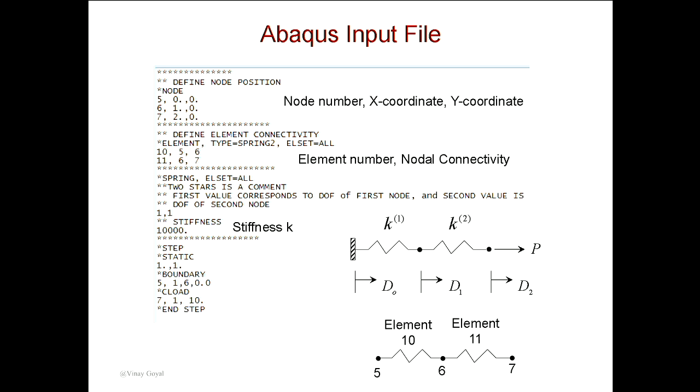Star C load is a concentrated load. You can apply a concentrated load, applied to node number 7, degree of freedom number 1, with an amount of 10. If you look, we get the solution here. If you do a hand calculation to get the deflections measured here and here, the values provided will match your hand calculation.

Does that make sense, everybody? Just a really quick synopsis. If you have additional questions, Leonardo will go deeper into it, both the GUI and by hand. In your homework, you also have to do it by hand. I want you to create that input file by hand. That's the goal.

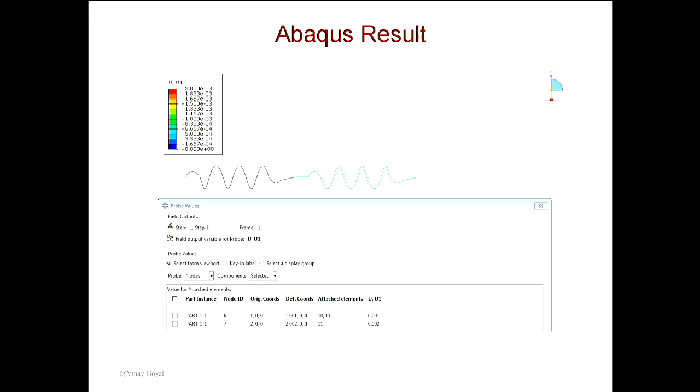Let's tackle a case I did not cover. I think I need to cover it a bit again so it's clearer, because problem 2 of the first homework deals with this, and I want to make sure it's very clear how we handle this particular problem. Let's look at a special case where you apply constraints that are non-zero. I covered that a bit last Tuesday, but today I'll go a little deeper.

The original example I gave was a 3-spring system fixed on the left, so G equals 0, meaning the amount of deflection applied is G equals 0. On the right-hand side is a load applied, P. We talked about that when there's a 0 constraint, you just make the code number 0 and 0. These are the degrees of freedom that are left, 1 and 2. That was the original example, and we solved that.

And we manufactured the code number matrix. Element 1 is 0 and 2. Element 2 is 0 and 1. And element 3 is 1 and 2.

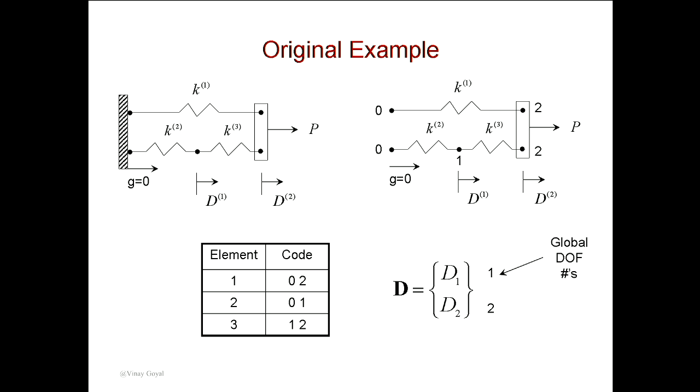So we devise that. For the original example, we finish it up, we did all the work for the assembly. But for the modified example, the one I want to give today so you're able to do homework problem number 2 more intelligently, let's say this is a non-zero applied deflection.

So apply 1 inch or half an inch. In that scenario, what I recommend is don't make it 0, make it 1. Don't put 0 for the constraint, just put 1 there for that particular degree of freedom, and then number the rest of it 2 and 3. So my code number for element 1 is 1 and 3.

For element 2 it's 1 and 2. Is that correct? Is everybody tracking? Yeah? For element 3, then I have 2 and 3. That's the code number. And so now the deflection or displacement vector is basically G, which is known.

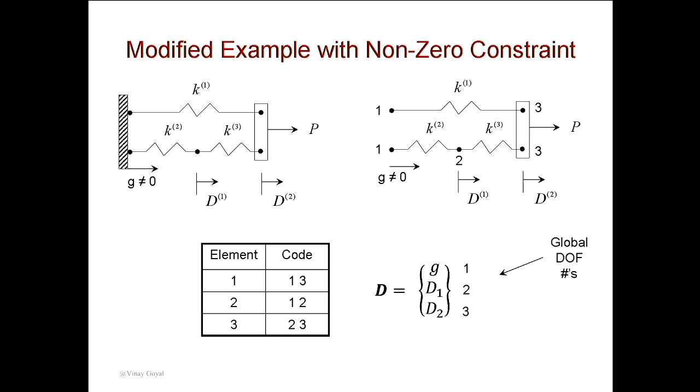This is like 1 inch, half an inch, okay? D1 and D2. So what you do now is assemble it this way, using this procedure. So you go and assemble it, and you can see now I got a 3 by 3 matrix. Before, in the original example, I had a 2 by 2. But in this example, I have a 3 by 3 because now I'm including the non-zero constraint in here.

That becomes important because what I want you to do is be able to go back to the matrix here. The whole K is known. That's all known. What is the only unknowns here? Somebody? D1 and D2, those are the unknowns.

But G is known. And since G is known, there must be a reaction force. There's no load applied on degree of freedom 2... and on degree of freedom 3 there's a load applied P. So all you have to do now is use the procedure I discussed in the previous lecture to solve for D1 and D2.

You can do it by hand, so you can actually solve the last 2 equations for D1 and D2, and then basically solve for the reaction force. But this is the automated process to do that if you wanted to do it with matrix notation. Any questions there? I already covered this before, but I'm covering it a little bit deeper because I think you're going to need that for problem number 2.

Is the non-zero constraint just for practicality, or is that just to learn? No, you can have situations like that. So say you have a heat transfer problem. In a heat transfer problem, I could apply a temperature. Well, that temperature is a non-zero value, right?

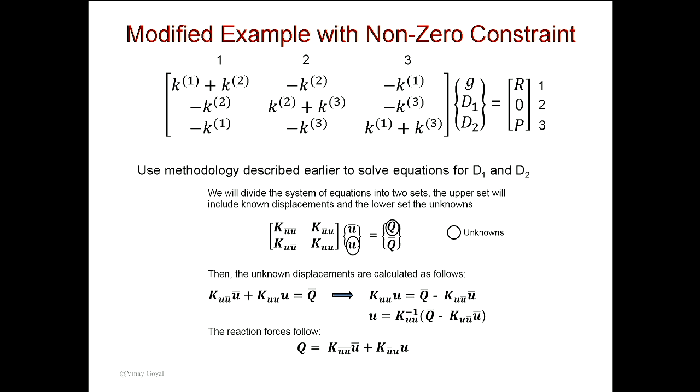I'm going to try to make the class practical. The homework, in some sense, is also practical because you'll try to discretize the domain for several different problems. But I'm not going to give you a rocket or an aircraft to solve because it will take a long period of time. I hope that at some point we can get a CAD model of a part, and then we can mesh it and do that kind of thing. I think that will happen down the road, hopefully.

All right, so that's it for springs. Today I'm going to transition to trusses, and then next week I'm going to transition, hopefully, to strong form Galerkin. That's the next topic coming up.

So let's tackle trusses today.

Any questions? Any thoughts? Anybody wants to contribute? I also welcome people that want to contribute from industry. If you're from industry and you want to give a lesson learned about something you did wrong in finite elements, let's share that so everybody else can learn that experience. That could be a good thing.

Today I found an error in a model where the coefficient of thermal expansion was per degree Celsius, but then the temperatures being used were in a different scale, like Kelvin or Fahrenheit.

So we need to pay attention to that. Some people don't pay attention to that, okay?

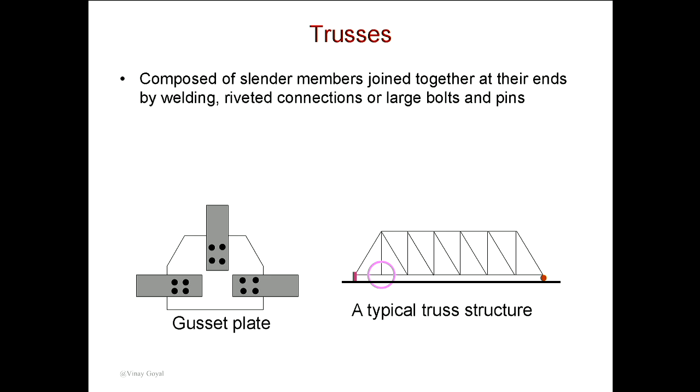Let's look at a truss analysis example. So for finite elements, a truss, in general, you've seen trusses, and this is not just strictly for civil engineering. Trusses also show up in a lot of applications with launch vehicles, spacecraft, and other things. I show a civil engineering structure because it's typical and easy to show. But if I look at a connection in a truss system, typically you'll have a gusset plate, and you have members connected like that.

In general, these connections use large bolts or large pins, but we're going to idealize that. You may have learned this in mechanics of materials, so this may be a repetition, but we'll idealize that connection as a frictionless pin. That way, the system now behaves like a two-force member. It does not take any bending, and no moments will be transmitted through a pin. Later on, we may be able to cover frames, which will be able to carry bending through the connections. The weights of the members are typically neglected, and trusses now become two-force members, meaning that the forces carried by each truss are only along the axis of the length of the truss. It can only take load along the length of that truss.

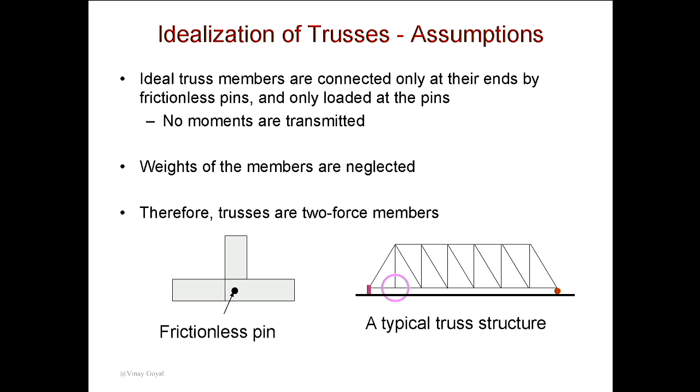From that perspective, if I look at the assumptions, basically you have a two-force member. Each truss can either take tension or compression, as you see there, but it will only be along the length of the truss. Does that make sense, everybody?

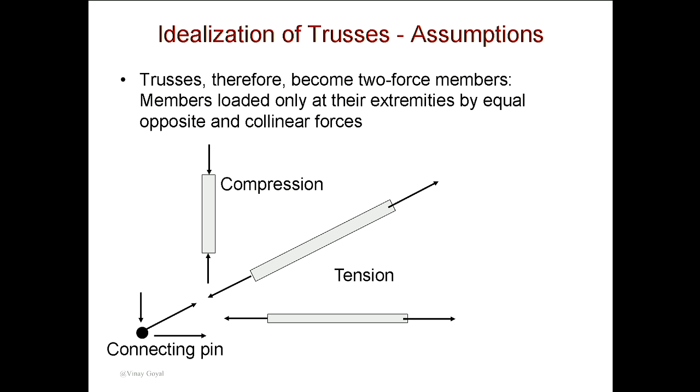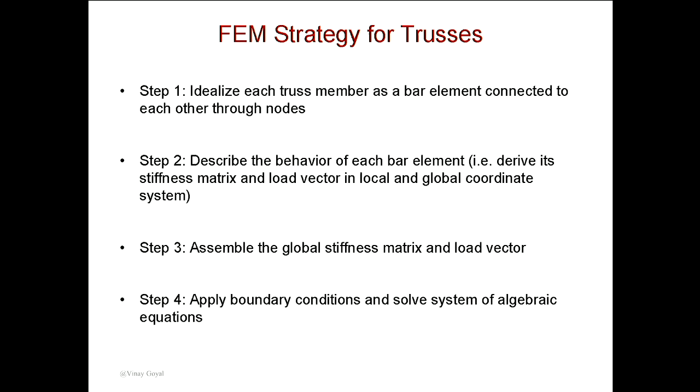Okay, so with that in mind, the strategy we're going to use with trusses is the following. Step one is to idealize a truss structure to be discretized into elements. The second step is to describe the behavior of a local element - we talked about the first step being discretizing the domain, and the second step is to approximate the behavior over a general element. The third is to assemble the system together, and you've already learned a little bit how to assemble things, and today we'll talk about that as well. Number four, we'll apply the boundary conditions, apply the loads, and then solve a system of algebraic equations.

So let's look at this example. This example is a truss system, and it's fixed here at the bottom. What you have here is element numbers being shown: 1, 2, 3, 4, 5, 6, 7. In general, this is a truss system I'm giving you, and we're going to discretize it by calling out the element numbers - that's 1, that's 2, that's 3, and so forth.

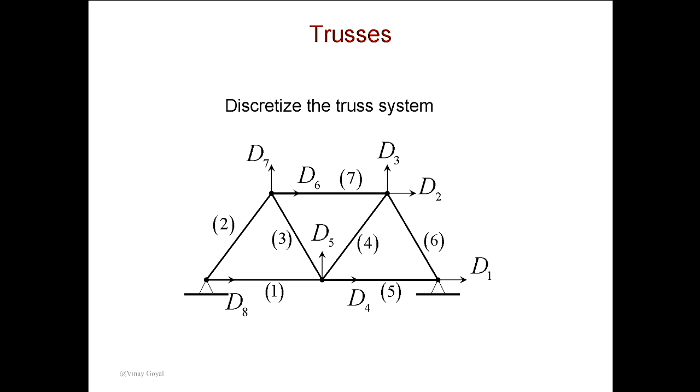Let's see, so in the next slide, I think there's - yeah, so let's continue here.

So if I take one truss member and try to understand its element behavior, I already know that a truss can only take loads along the length of the truss. For that reason, I'll look at it, and that's how this element behavior, at least the diagram for this element, will look like. This node could move an amount di, this node could move to the right an amount dj, and correspondingly there will be an internal load acting on this part, balancing the external forces being applied. So at the local element, you're trying to develop the element - we call it the element formulation. Anytime I talk about developing the behavior of a local element, this is called an element formulation - formulating how a general element behaves. Because the idea in finite elements is if I can generalize the behavior of an element, I basically know the general behavior of any other element that has the same shape. That's the whole point of finite elements - it simplifies life, it simplifies the process.

So if I look at the stress acting on this bar, that's P over A. If I look at the strain, it's basically the relative deflection, dj minus di, divided by the original length - everybody knows this formula, change in length divided by L, basically. And so you know that stress is related to strain through what? Hooke's law - stress equals E times epsilon. How do I know this relationship? Stress related to strain - how do I find this relationship?

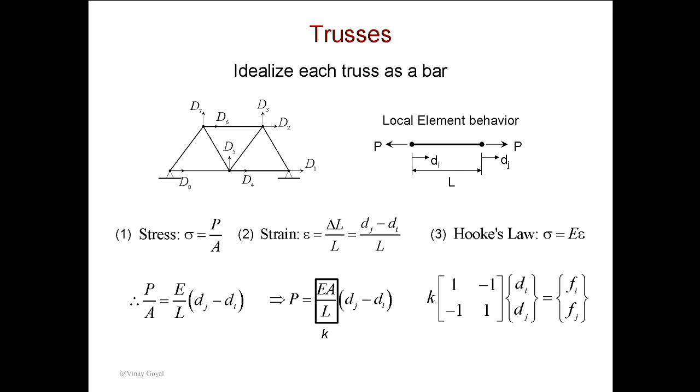But this is the problem. The problem with this is that I have bars oriented in different directions. That's the problem. So maybe that formula works very well for the bar that's horizontal, but if I have bars oriented in other directions, how do I deal with that?

Because the idea in finite elements is to be able to have a systematic approach. And so I want to have global deflections that are referenced to a coordinate system - this is my X coordinate system, this is a Y coordinate system. I don't want to have a bunch of local coordinate systems. I want to be able to relate that local coordinate system to the global coordinate system and still be able to solve the problem efficiently. Does that make sense?

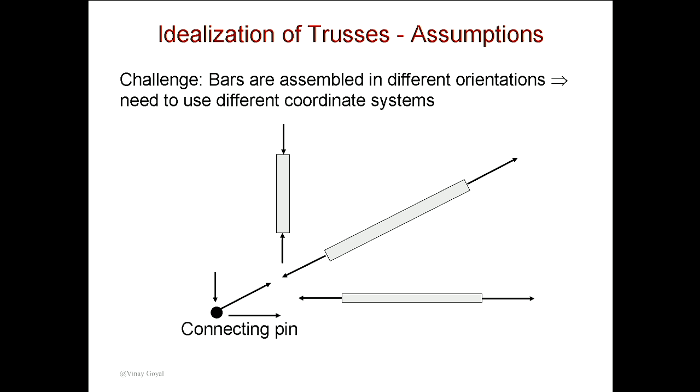Okay, great. So what I'm going to do - don't get freaked out with the math, but if you take your time to be patient, you'll follow it. That's really the goal here.

So I'm going to attempt to use this for the first time. We'll see how this goes. Pen on. Good. All right, you're not going to see my face for a little while. I don't think this is good, whatever happened. Okay. All right, so if I look at a regular element, which is this one here, let's see if this writes. I don't know what that's coming up. Okay, this methodology is not working for me right now. So that's okay, we'll continue. Old school, old school, all right.

So if I look at the local element behavior, that's a local system. If I look at how much the deflection will be for this node, it's going to move some amount to the right - okay, let's call that del jx. What I really wanted to do is represent that in the global coordinate system. How do I do that?

Well, that can be represented, if I know the angle beta, I can then break this up into two vectors, this one and this one. So I can project this del jx into x and into y by using the cosine of beta. Does that make sense?

Okay, and then now I look at this contribution here, this del jy. And again, I can do the same thing. That del jy is this one here. I can now project that into the x-axis and y-axis, right?

And so if I can do that, now what I need to do is relate this - so that's a contribution of del Jx and del Jy. I have to relate this now to the global system. Let's say the global system, the deflection is dJx and dJy. Okay, so tell me how I calculate dJx then.

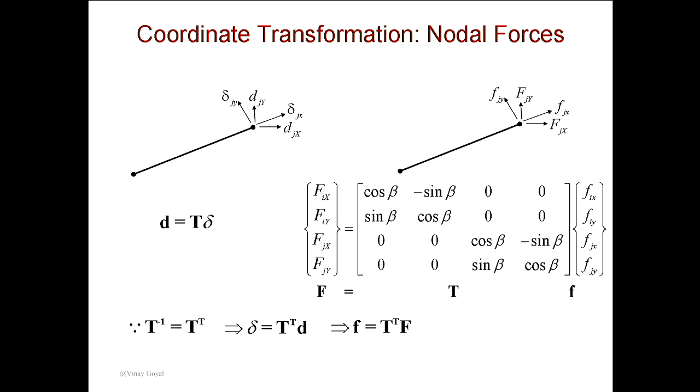Because this class, that's what computers are for. They're there to track all these matrices. And that's what finite elements is about, coming up with an approach so the computer can take care of it. So don't feel like you have to know the steps on how we derived it, because that's what this class is about. But what I want to make sure is that you are not stressing yourself out, okay? Because if you stress yourself out, you will not learn, okay? So that's what's important right here for you to understand.

That we come up with the element formulation that works by referring the quantities to a global coordinate system, because that's what trusses have, orientations that are not straight. They're different orientations. So let's move on here and look at what that calculation looks like.

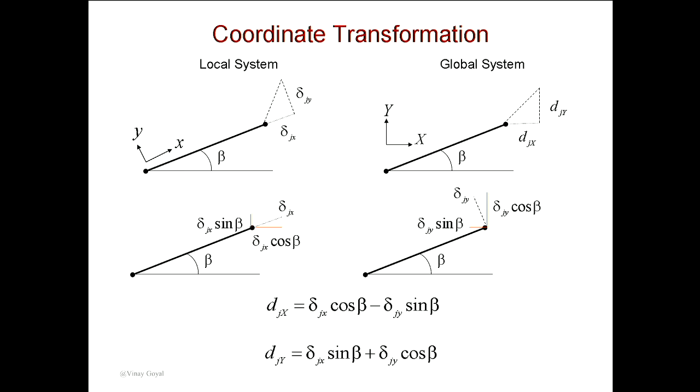Okay, what's important for you to also remember is how that beta is measured. Beta, in the way we've defined it, starts from the x-axis, measured from here, this x-axis, moving counterclockwise. Okay, so that's what's important for you to kind of keep in mind.

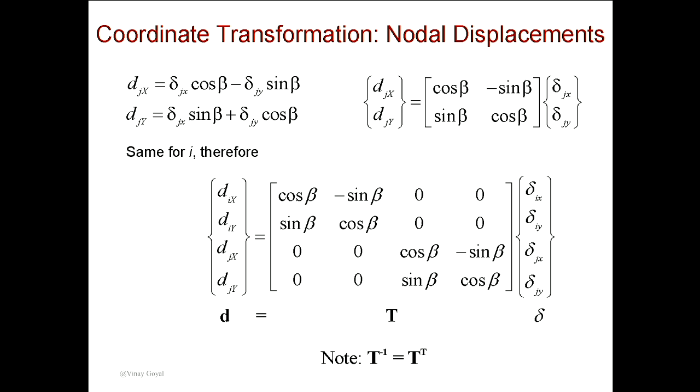That's important because when you develop an element formulation, you have to keep track of how you develop the element. You cannot arbitrarily make up a convention and then switch it later. You have to keep track of that.

So now I know how to calculate a stiffness matrix. And the question is, how do I apply this? Well, that's what we have examples for, to go through that process.

The same process for assembly, we already have the element formulation here. Everything is in global coordinate system, isn't that nice? And I have the local element formulation, I have the stiffness matrix, and now for every element I will have 4 code numbers now that I have to track, not 2 like before. So you have to keep track of that.

In this example, the summary is basically we discretize the body, we develop the local element behavior, and then we'll use code numbers to assemble things together. And I'll give you an example, hopefully it'll be of help. So example number 1 has a truss system as described on the left-hand side.

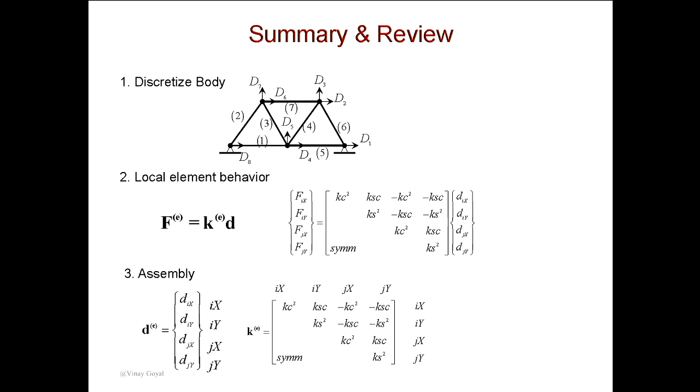Any questions? Any questions?

So as an example for element 2, all I have to do is plug it into my formula for K. That's all I have to do. Let's look at the code numbers.

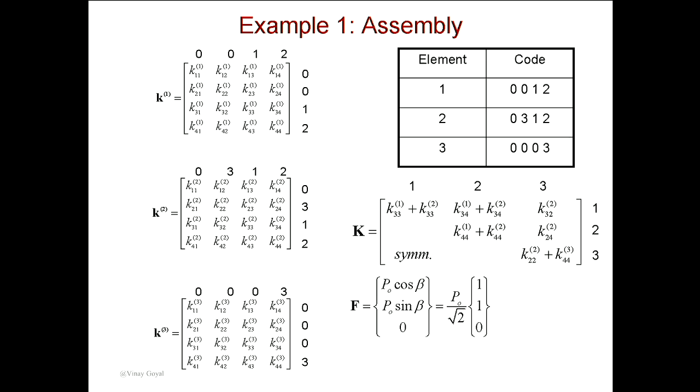So when do you assemble the force vector again? Here, there's no reason to assemble the force, because remember, we talked about applying concentrated forces. We're applying concentrated forces at this level, in the global system. The forces are not applied at the local element level.

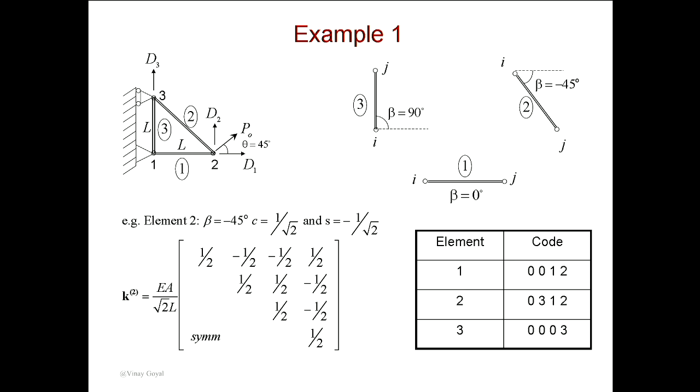Now remember, there's a difference here. In homework problem number 1, there's a distributed force. I want you to go back to lecture 1, where I show you how to deal with distributed forces. Those need to be tracked at the element level, and those need to be assembled. Let's look at that again if possible — you're going to need it for problem number 1.

So in this problem, what I'm looking for is deflections. But in real life, am I just looking for deflections? I want to know when the structure fails, whether it's safe or not. Deflection can be an important consideration, but you also need to look at whether the structure fails by force. That's the angle — in both problems I gave you, I'm asking you to calculate the stresses as well and compare them to the allowable of the material.

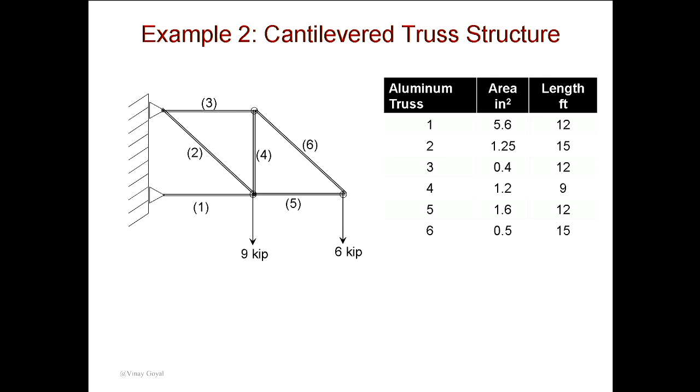So moving on here — where do I have it fixed? Here and here. So what code numbers will I assign here? 0 this way, 0 that way, 0 this way, 0 that way. In the next line, what I show you is the element number, the way I've described it: 1, 2, 3, 4, 5, and 6. And then the other thing I've done is put the code numbers here: 0, 0, 0, 0.

For this node, I'm making it 1 and 2. But I could have made this one 1 and 2 instead — I just chose this way, to answer your question. This makes it really hard for us since we don't have a grader yet, I hope we get one, but it makes it hard to grade. There's a reason why I'm asking you to compare to Abaqus — it better be right, it needs to compare well to Abaqus. So 3 and 4, and then we'll make this 5 and 6.

So how many degrees of freedom do you see here? Six degrees of freedom. It's kind of painful, right? Because you have to invert that, and I don't want anybody here to invert it by hand. You want to use MATLAB in that situation — or Excel actually can invert things too. Surprisingly, I didn't know it could do it.

So for member one, what is the code number? Don't look at the solution, focus here. What is the code number? I start with node I, and that's node J. So the code number is 0012, and that's what you see there. I chose this direction — you see these arrows? That's how I chose to start the element, from I to J, for every element. You can choose any direction you want, but then when you calculate beta, you have to be consistent. Beta is measured from I to J, the line that joins I to J, to the x-axis. That's how you measure beta.

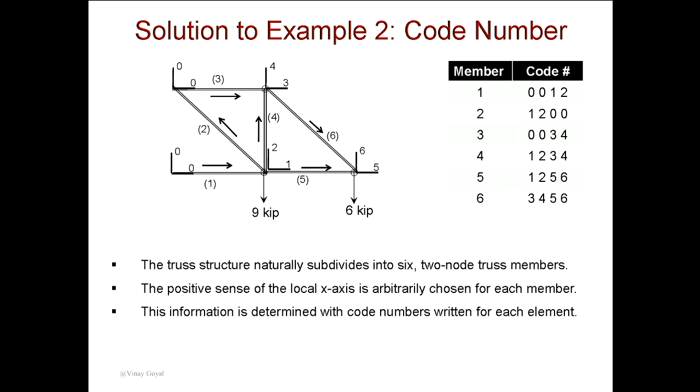So let's do another one. Element 6 goes from I to J here, so that's 3, 4, 5, 6 — for element 6. Anybody want me to do another example? Well, you follow it. We're good? I like when you guys do this — it means I can go on. That's great. So now I have a load applied here, a load applied there, great.

All right, let's just keep moving on here. It's going to get boring from now on because it's really easy. Member one — if I is here and J is here, how much is beta?

So beta is 0. EA over L is easy. The modulus of aluminum is 10 times 10 to the E6, but you see 10 to the E3 because we're doing everything in kips.

Area is given for each truss member, so you have that information. The length is given. Now it's a trick problem because the length is given in feet, 12 feet, so I have to convert that into inches. I see a lot of errors being made in industry, so you will see discrepancies. You have to convert everything to be in the same unit, okay?

And I'll trick you in a homework and midterm exam because I want you to learn it. I want to make sure that you are aware. You're not just trying to mechanically solve something. You need to use your head and try to understand what you're doing, okay?

And so from that perspective, we get K. And if I substitute in my formula, in the formula that I had there earlier - this formula here, cosine of beta, sine beta - you put all this in, you will get for beta equals 0, that to be the stiffness matrix for that element, just for that element.

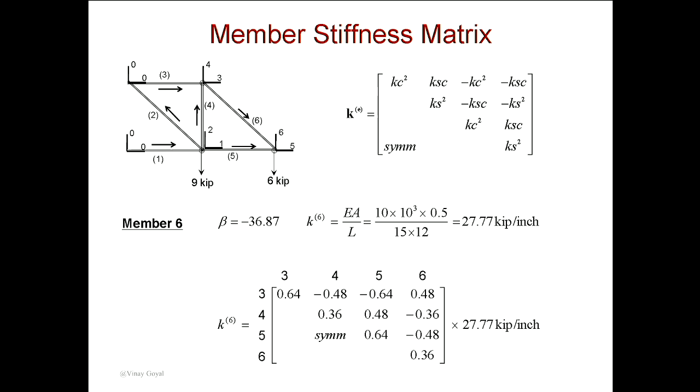I'm only applying a load here, with code numbers 6 and 2, locations 2 and 6, and they're actually acting opposite, in a negative direction. So if I go here, that's what I did: in position 2, I put -9, and in position 6, I put -6.

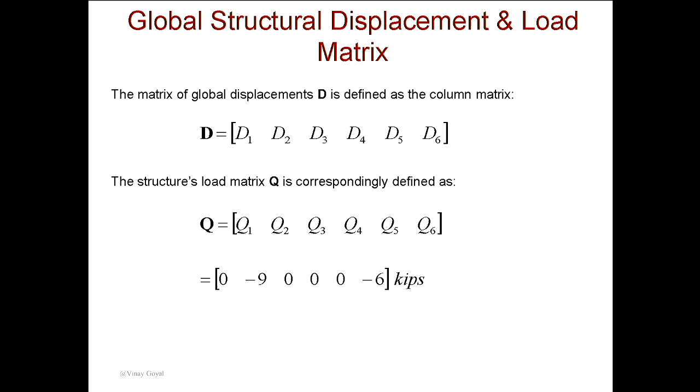Now I have my stiffness matrix, I have the deflection matrix - sorry, stiffness matrix, load vector. What do I need to do now? Invert K and solve for the deflections.

Moving on here, let's say - so now, are you done by just getting deflections? Are you done? I mean, we can go home because we calculated deflections. What else do I need to do?

I want to know, in addition to knowing deflections, which is great to know, I want to know when the structure fails. So then I need to calculate the forces in each member. To do that, I know the deflections, so what I'll do is go to the local elements and calculate that information.

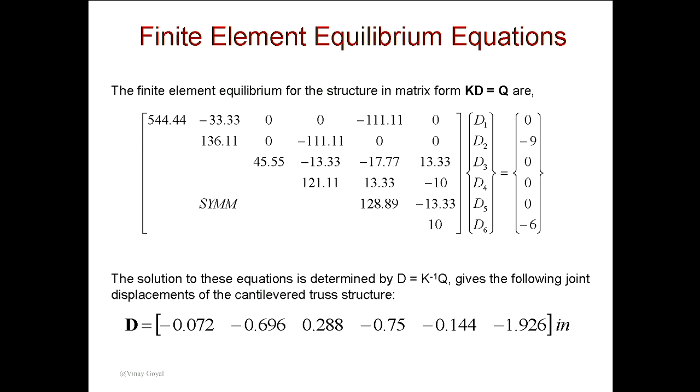So if I look here, remember guys that the local force was described as small f. Remember that? The local force, right? So let me go back and remind you that a little bit.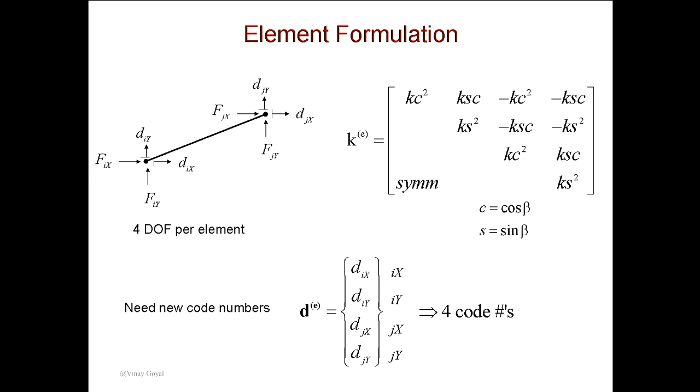So if I go to the diagram here, the big F was the global direction, the force in the global direction. I'm going to look at small f, which corresponds to the local direction. That's the one I'm interested in, because I'm interested in the force along the truss.

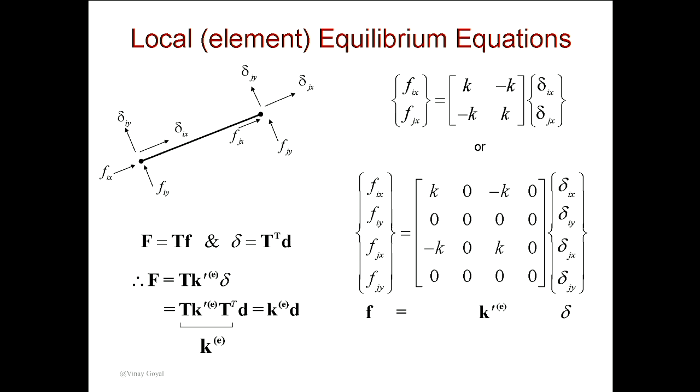And so we came up with the equation - I don't know if you recall - the relationship of forces in a local element in the global coordinate system, and then forces in the local element in the local coordinate system. We have a relationship there. So let's use that relationship to try to calculate the local forces in the system that I care about.

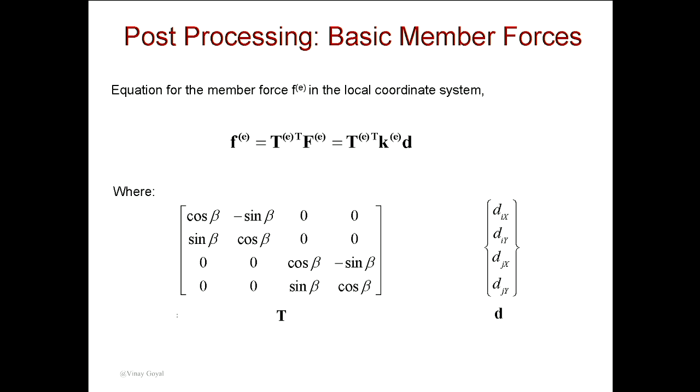Oh, here it is. So small f equals the transpose of the transformation matrix times big F, and big F is K times D. I know this, right? And so T, the transformation matrix, is known, and all I have to do now is calculate that for every single element.

So let's look at how I did that there. I know the transformation matrix for element number 1. I know K, I know the deflections - I calculated these numbers already, I got this earlier. So this was 0, 0, and then code numbers 1 and 2, D1, D2. This was the value for D1, that was the value for D2.

So if I multiply all these things together, guess what I got? Look at the numbers I got: the force is 28 along here, and then 0 transverse. That makes sense - that's what I told you we should be able to get before, because that's the assumption in this theory. So that's a great check, actually. If you don't get zeros, then you have a problem.

The question is, is the member in tension or compression? So you can draw it, because we say FIX is 28, so that stays the same direction. FJX is minus 28, so we need to reverse that. So how is it acting? In compression. So that's how you know it's in compression or tension.

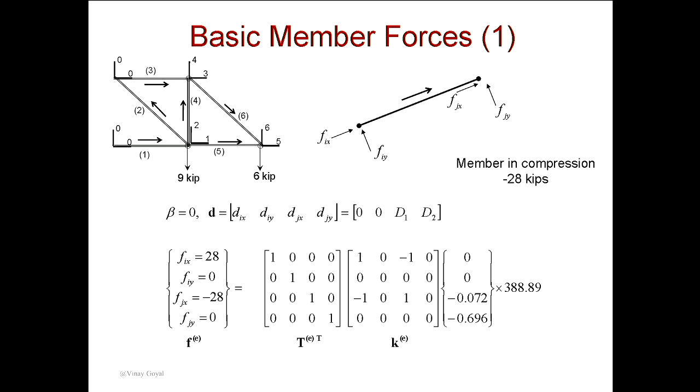Let's do one more example, because I don't want to bore you to death. It's the same formula over and over for every single member. For another member, we calculate the transformation matrix, multiply by the stiffness matrix for that element in the global coordinate system, times the deflections. And in this case, what do I have for element 2?

For element 2, I'm here, and that's 1 and 2, 0 and 0. So I have the deflection D1, the deflection D2, and 0, and 0. And if I multiply all this together, guess what I get? I get 0 transverse to the truss. That's right, it should be 0. That's what we talked about, because these members only carry load along the truss.

And finally, I have minus 25 and 25. If I plot that here, minus 25 means I have to reverse the sign, or the orientation of that vector. And then 25 is acting that way, so that means tension. And then I can repeat this process for every single member, and we've done that here for every single member.

Now, to get the reaction forces here and here, the approach is that you're going to take, remember I put here 0 and 0, 0 and 0? So let's just number those out, 7 and 8, 9 and 10. Let's finish it up, and then you'll assemble the full stiffness matrix with 7, 8, 9, 10 included. Then when you multiply that by the deflection vector, okay, because these are all zeros.

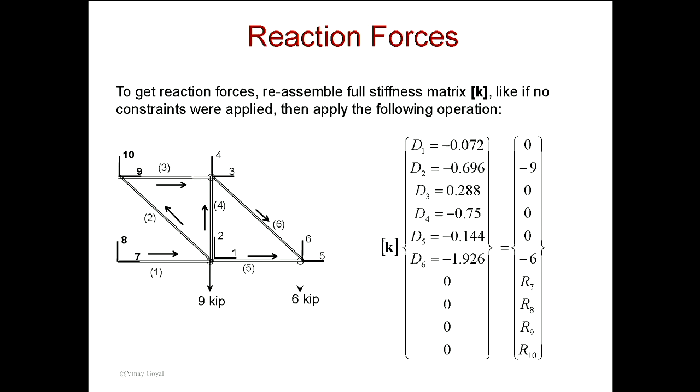Does that make sense? Now I apply the external loads—C load, concentrated load. Where's the concentrated load applied? We talked about applying it here and then here. In the original example problem, if you go back, you can see it was 9 kips downwards, 6 kips downwards in these two nodes.

So let's go back to the problem, and I applied it in node 2, right? Does that go in node 2? So node 2, degree of freedom 2—the force is acting in the vertical direction, and that's degree of freedom 2 for that node. That's minus 9,000 pounds. And then for node 3, I have 6,000 pounds downwards, so node 3, comma 2, because degree of freedom 2, minus 6,000 pounds. Submit it into Abaqus.

Abaqus solves it within like 0.01 seconds—I'm not kidding. All that effort I put in, all these charts I was showing you, and then Abaqus just, bam, does it. Well, then what is the next step, guys? What if this thing was deforming upwards, the whole thing was going up?

What would you say? There was an error. There's a problem. Because I apply the load going downwards, I expect the whole thing to move downwards, right? So it's very important for you to check that things make sense. And also you can check other things, like the deflection should be the highest here, that makes sense.

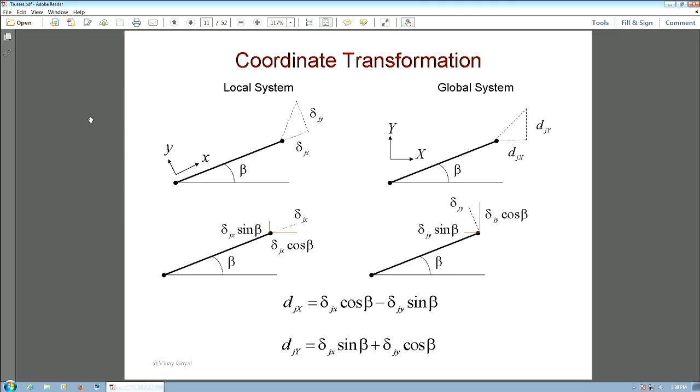Okay, now that you're back, I'm going to offer you an opportunity to make extra points as well. One opportunity that you have in this class is that you'll have the chance to program, and you'll get points for submitting a program that actually does what Abaqus just did. So if you develop an input file just like this one,

and you write a program that takes this information and gets all the deflections, gets all the forces automatically, then you'll get extra points if you submit that. It needs to be well explained, the code needs to be well explained. You should have a cover page for the report with explanations of how you went about it.

Throughout the course, I'm going to offer these opportunities for various problems. For the truss system, I'm offering this opportunity because it's a great way to start learning how to code stuff up. I give you some resources in my book on how to code these things with pseudo algorithms, and in the appendix I have MATLAB examples on things like that. I won't have time to teach what's in the appendix, but

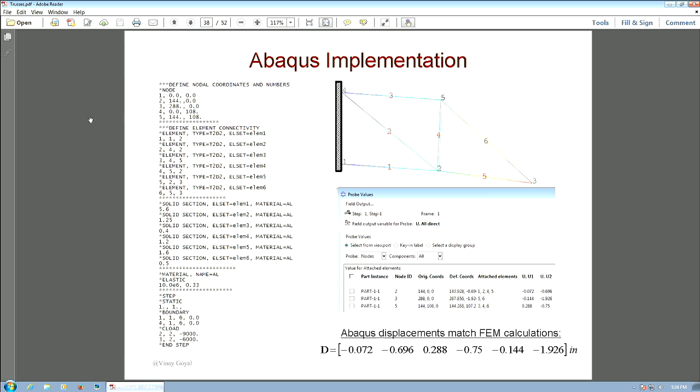Yes? So the code should be specific to a problem or can it work for any number of elements? No, the code has to work for any problem. Well, I'm not going to make your code work for 10 million degrees of freedom. It should at least work for 100, right? It should work for a large number of elements and nodes. I want to make sure it works, right?

And not only that, you have to show that it works. So you have to run some examples with your code, and then compare it with what you get with Abaqus. You can prepare tables comparing Abaqus to whatever you think is necessary to validate your code, deflections, forces, yeah. But I do want to warn you, I don't want you to put this as the highest priority.

The highest priority is to finish the homework first, do the CAE part of it, and then if you have extra time, because you have so much free time, code it up. And I recommend it. When I took the course, I did it, and for me it was not extra credit, it was required. And I learned a lot by doing it, okay? So I do recommend it.

But I also know in a quarter system it's pretty tight. When I did it, it was a semester system, so I had more time. So for that reason, I'm making it optional, but strongly recommended. If you're going to pursue finite elements as an area of expertise, strongly recommended. Okay, but with great reward, you get points, extra points. Okay, great. With that said, I'm going to move on.

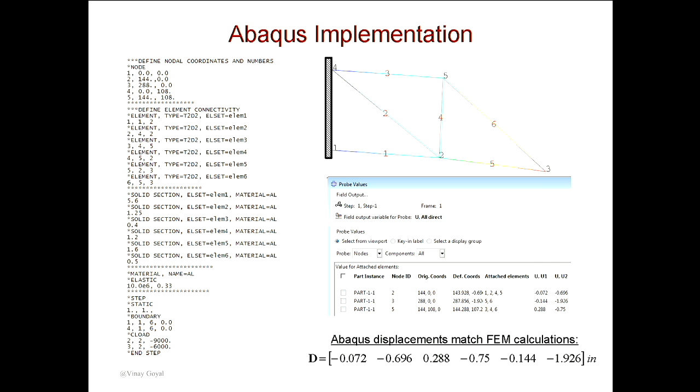All right, so moving on here, I want to give an example of a situation that you could encounter in real life. A situation where this node, for example, can only slide on a slanted surface, okay? With a slanted surface measured at an angle alpha along the x-axis. So this is a roller, and now I'm going to ask you a trick question.

This is a trick question, a good exam question too. If I have made it fixed, do I need to worry about what I'm going to explain next? If I draw the triangle, rotate it like that, and make it totally fixed, do I care about what I'm going to say next? No, because it's fixed. So the deflection this way is 0, the deflection that way is 0. Okay? What makes this problem a little bit challenging is that all my loadings and boundary conditions and deflections were converted into a global coordinate system.

However, this roller makes it difficult because it is an inclined surface, and now I have to somehow approach it, right? Because everything is in a global coordinate system. The deflections are, the forces are, but yet the constraints I want to impose are easily imposed in a local coordinate system. So here you can see that. It would be easier if the coordinate system was this way, perpendicular to this surface and along it, because that way I can say, okay, perpendicular is 0 and along is free to go, right? I can't do that right now easily in a global coordinate system.

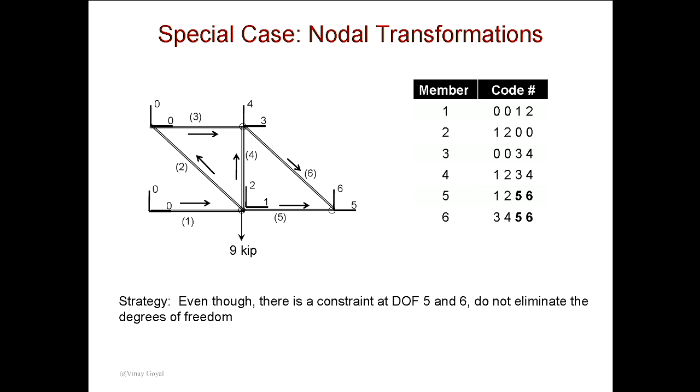And so I'm going to proceed the same way as I did before, assemble the whole thing with code numbers. I'm not going to repeat this because it's the same approach. But what I'll do, and this is where the tricks come in, and I hope you can follow me. And if you don't, please ask me questions now.

What I'll do, I'll transform 5 and 6 locally so that 5 prime is aligned with the slanted surface and 6 is perpendicular to the slanted surface. I'm going to do that. And if I write how D5 and D6 relate to D5 prime and D6 prime, I will use this equation, and you can check it at home, that this actually works out. So for 10 points extra credit, I want you to demonstrate that this is true, that this formula, transformation matrix, in fact, can rotate D5, D6 into D5 prime and D6 prime.

And that's not very difficult to do because I already did it earlier in class, right? That's one of the things I did earlier in class.

Similarly, the forces, the global forces can be rotated as well. So I have Q5 and Q6. I can rotate into Q5 prime and Q6 prime using the same transformation matrix. So I can use the same approach. And I'm going to call this transformation matrix TA. You can call it whatever you want. I'm just calling it TA for the purposes of this class.

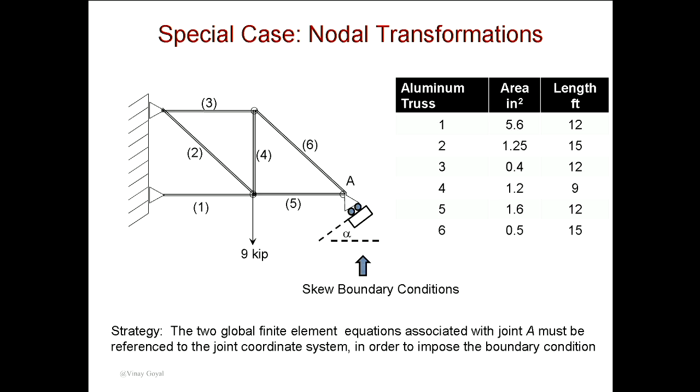Now, Q5 and Q6, you don't know what to do with them. So leave them like that for now, right? Because Q5 and Q6 are related to the situation here. I mean, that's Q5 and Q6. And I don't know how to quite address that right now. And I don't know how to quite address D5 and D6 either. For that reason, I'm going to take this and I'm going to think about what can I do.

What I can do is to somehow make this D5 prime and D6 prime. That's what I can do. And make this Q5 prime and Q6 prime. If I can make that happen, then I know how to impose the boundary conditions. Then I know how to apply the global forces.

So to accomplish that, I'm going to transform this vector D1, D2, D3, D4, D5, D6 into D1, D2, D3, D4, but with prime on D5 and D6 prime. And the only thing that will be affected is this guy here. Can you see that everything works out? If I multiply this transformation matrix times that, I should be able to get the one on the left-hand side.

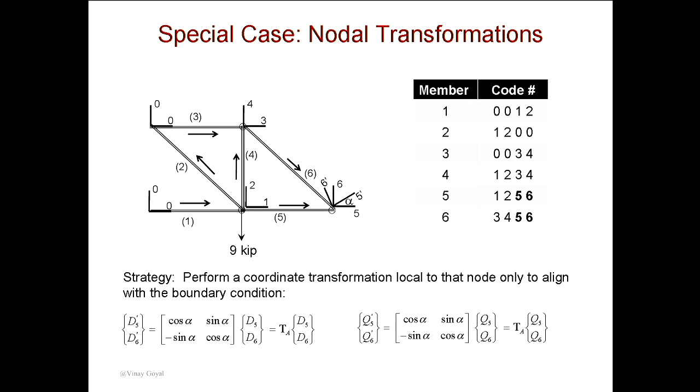So all I have done, I've augmented, and that's the word that we should be using, this matrix into including the other degrees of freedom. So you can have them all there. I can do the same thing with the forces. So Q1, Q2, Q3, Q4, Q5, and Q6. Q5 and Q6 are the ones I'm interested in having in the local coordinate system that is along the slanted surface. That's really what I want.

Any questions on this? I'm going to give you like a minute to kind of digest a little bit. And then please raise your hand if you have a question. Because you will have a homework problem on this.

Okay, no questions so far. So to assemble, you'll assemble it like normal, just like normal. And all we're doing here is trying to figure out what to do with these guys.

We're going to tackle it by transforming it so that these two guys, D5 prime and D6 prime, is in local coordinate system so that it's along the slanted surface and perpendicular to the slanted surface. Same thing with the forces, Q5 and Q6, Q5 prime and Q6 prime. I'll call this this variable here, and I'm going to use that.

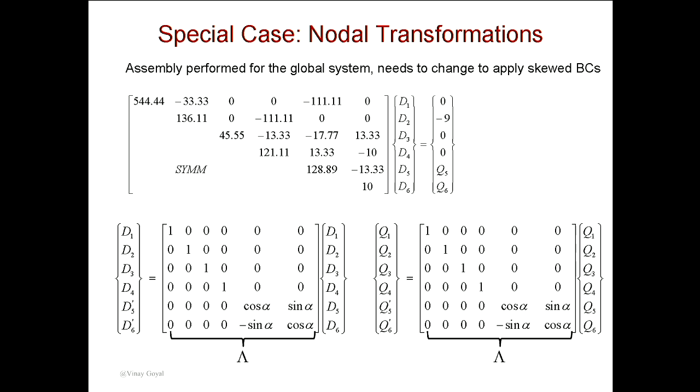So moving here, you can see here that, let me call this D prime, let me call this vector D prime, I'll call this that symbol. And then we call this D. We'll call this Q prime. And then lambda, right, I believe? And then you have this Q. So then I have this: D prime equals lambda D, Q prime equals lambda Q.

My real goal is to somehow put things in terms of D prime and Q prime. If you see here, my stiffness matrix that I've assembled is K with the D's, and this D's is not the way I wanted it. And the Q, I need that so it follows that slanted surface.

So to do that, you can quickly see, I can calculate D very easily. I know D in terms of D prime because all I have to do is invert this. If I invert this, then I can get D. Now, the inverse of a transformation matrix is what? The transpose. So all I have to do is transpose this to get transpose times D prime. I'm solving for D basically from that equation on the left. And then this is equal to Q, right?

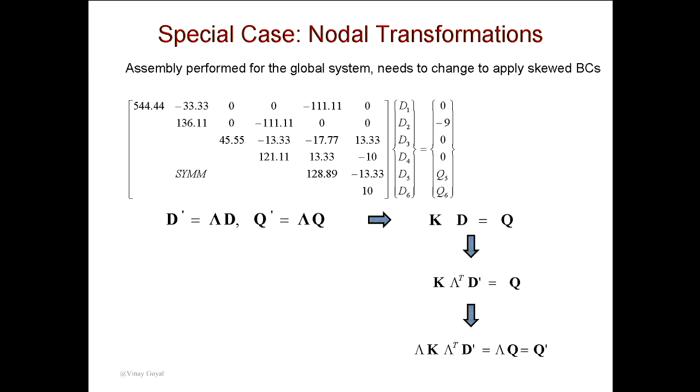Okay, now if I pre-multiply everything, this is a trick. If I pre-multiply everything by lambda here, then I get lambda on this side, I get lambda on this side, and guess what happens? Lambda times Q is Q prime. So I get Q prime right there, and I'm done. Now I have been able to relate everything so that, and I'll show you in the next line.

By using this technique, I'm now able to have D5 prime here, D6 prime, and for the Q prime now I can impose the boundary conditions. You can see. So for D5 prime, what's happening? It's free to move, right?

So is it unknown or known? Along D5 prime, it's unknown, I don't know. Along D6 prime, what is it? It's fixed, so I put a 0 here, right? And then Q5 prime, because D5 prime is free to move on this direction, what is the load? There's no load that is being applied there, so that's 0.

You can see how nice this is now, because I've transformed it, and you have to perform this operation, this lambda times the stiffness matrix times this lambda transpose. You have to perform that, of course. But after you're done performing that multiplication, everything becomes really easy now. Because the only ones I don't know now is D1, D2, 3, 4, and 5. That's the only thing I don't know now. So all I have to do is solve the first 5 equations for D1, 2, 3, 4, 5 prime, and then use those equations to get this Q6 prime, this reaction force.

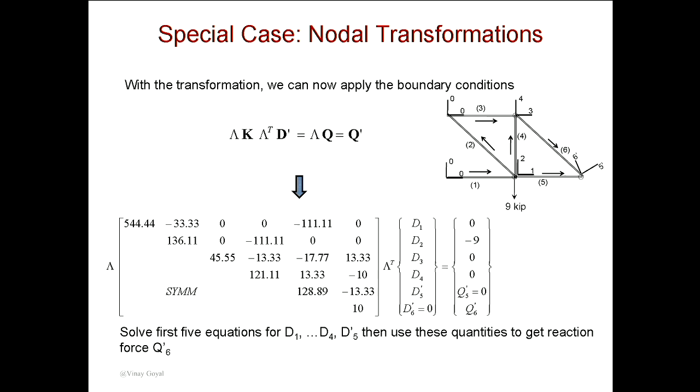Any questions on that? This is a little bit complex, I understand that. But like I said before, if you understand the process, that's really what matters. I want you to understand the process. That's really what I care about. But again, after this class, if I was you, I'll spend another hour trying to revisit what we've learned here. Otherwise, you will forget what was discussed here, okay? So I really recommend that. It will be of great value to you.

Now, how do I do that in Abaqus? Because it's kind of fun to do things 2 ways: one theoretically, and then, well, I don't know if you consider this fun, but it's a good opportunity to learn, right? And so the way to do this in Abaqus is the following.

So how many nodes do I have? I have 1, 2, 3, 4, 5. It's the same problem I gave you before, but the only difference is I'm not applying a downward force here anymore. I'm just applying, I want things to be inclined on a surface so that this node only moves inclined on that surface. So everything is the same.

The only thing I'm going to do is create a node set. And a node set is just a fancy way of saying I'm going to name this node with a name. I'm going to give it a name. So node number 3, I'm going to call it skewed. So I call it n set, comma, n set equals skewed. That's the way you name that node and give it a name.

That's how you do that. So node 3, I wanted to give it a name, and I thought of the word skewed. I don't know why, but that's what I gave it.

So skewed. The next step is I want to transform the behavior of that node, n set equals skewed. So star transform, comma, n set equals skewed. What I'm going to do here is provide basically, and now I have to draw it here so you can see it. Hopefully this will show up in the video.

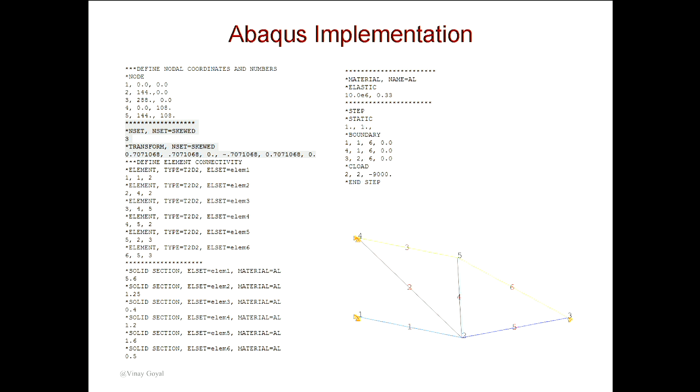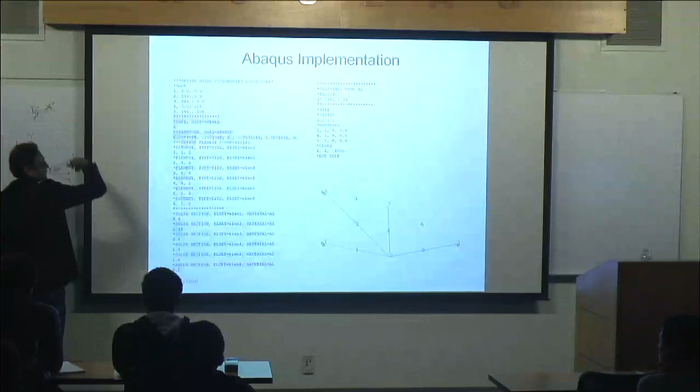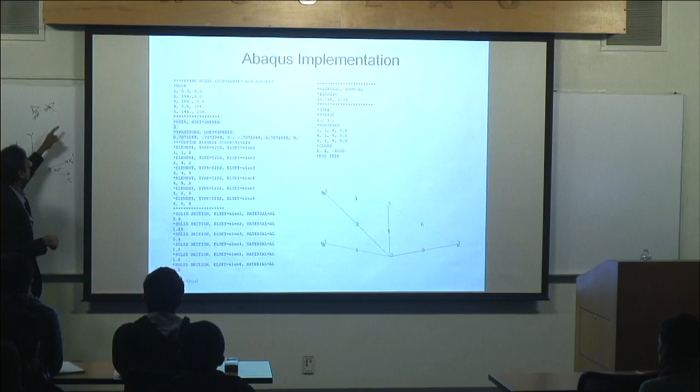The question for the video is that if instead of having this constraint situation, you have this other situation, I think is what you're asking, right? So it rolls this way instead of that way, right? Is that the question? Then you'll have to make sure that when you do the transformation, you have it correct. You have to do the transformation correctly for that. And then you apply the boundary condition in a similar fashion. It's no different.

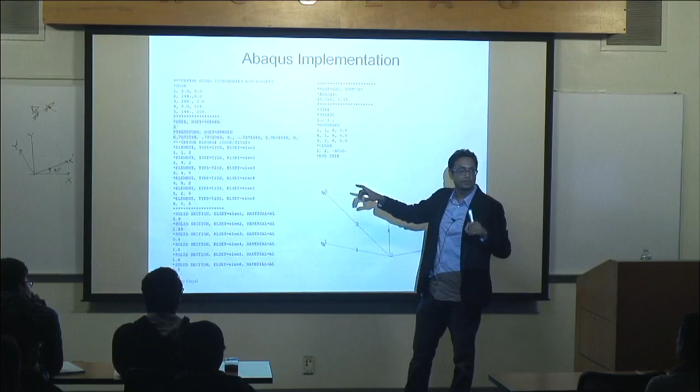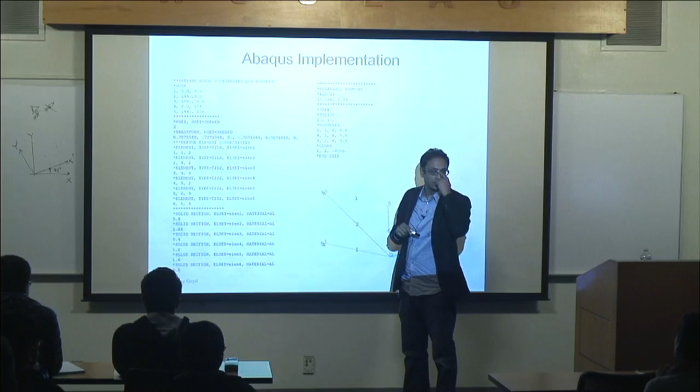Arian: In the boundary, when you call in node 3, how come you don't call it the skewed name that you gave it? Instructor: Sorry? How come I don't call the new... I could have put the word skewed there. So the question for the video is, how come I don't call it skewed later on? I can actually call it skewed here. I could have written the word skewed here. Arian: Okay, but how does the code know that 3 doesn't refer to before transformation?

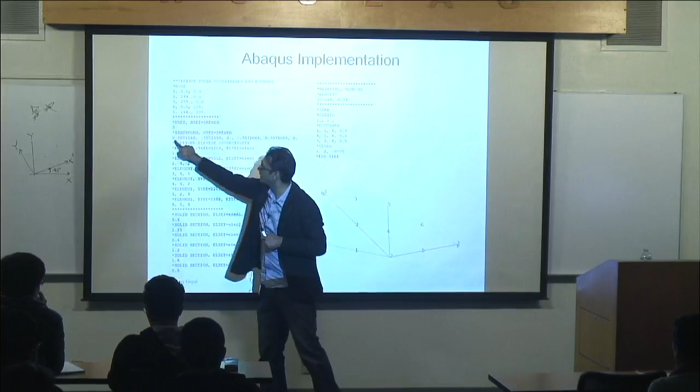Instructor: The code knows that. So the question is, how does the code know that 3 is referred to as skewed? Is that the question? When you're calling 3 and saying direction 2 is fixed, how does the code know direction 2 is not perpendicular to the x-axis? Because we transformed node 3, right? We transformed node 3 to have a different coordinate system. So now it's x prime and y prime. These are my degrees of freedom now, 1 and 2. These are my new orientations for degrees of freedom along x prime and y prime.

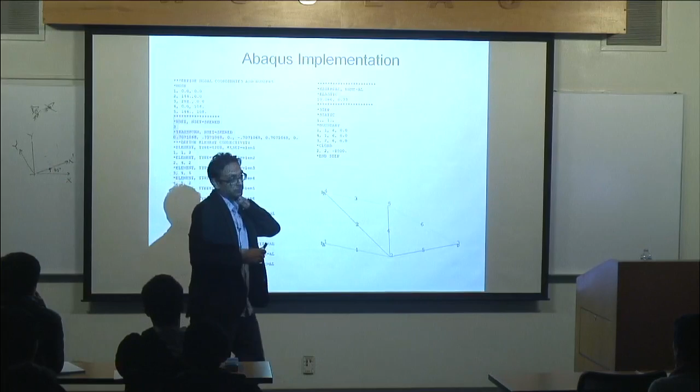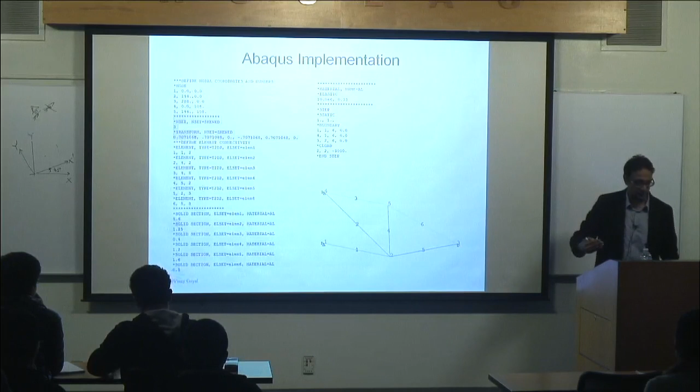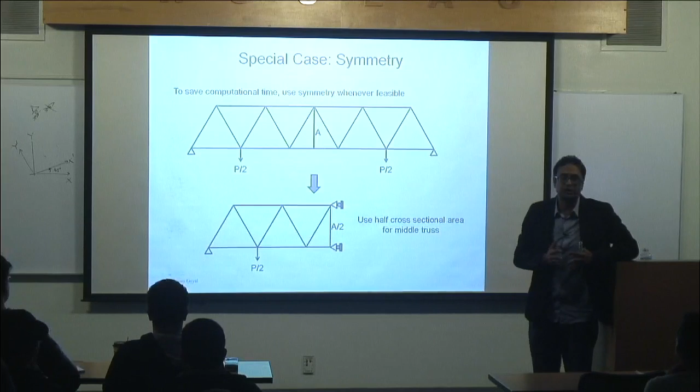I want to show another special case that you may have. This is an area we can take more advantage of in industry, and something I want to instill in you: it takes a long time to solve some of these problems because they're quite complex. So it's important to find ways to simplify the problem so you can make use of computational efficiency. For a problem this small, it probably doesn't matter, but for the purpose of learning, I think it's important for you to practice that.

Your homework problem is going to have a symmetric boundary condition so you can practice that. If I give you a problem that clearly looks symmetric, then instead of modeling the full truss system, just model half. Put a roller here and a roller here, because these nodes cannot move to the right, and this node cannot move to the right, so therefore you should have a roller there because it's symmetric. The second thing is that this middle truss, because I'm cutting the whole thing in half, needs to be modeled with half the cross-sectional area. Other than that, if I solve this problem, I'll get the same answer as the full problem.

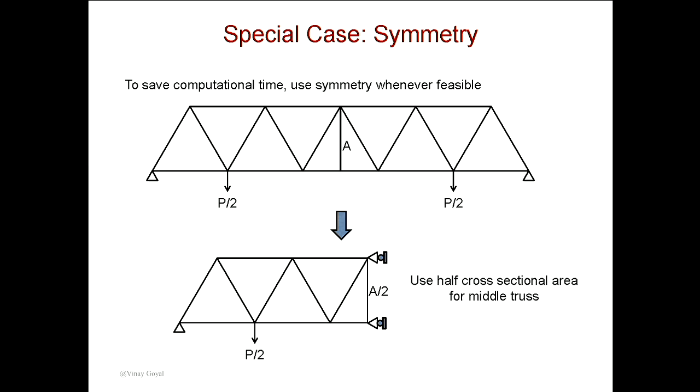This is very important, even for aircraft models. Aircraft models are typically modeled using only half of it. A full 737 model only models half of that. Why model the whole thing when you can just model half and get whatever you need? If you're interested, at the end of class I can show you how they account for worst case scenarios like bank angle and other situations that are not symmetric. They have ways to account for that in a symmetric model. So that's a special case I wanted to show you.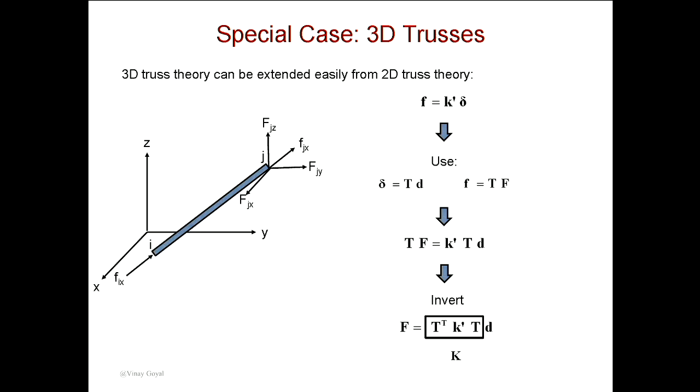So now my global stiffness matrix for the 3D problem is given by that. I've done the operation here for you: this times that gives a 6 by 6 matrix, hopefully 6 by 6 because I have 6 degrees of freedom. Look at it: 1, 2, 3, and then the same ones here, 1, 2, and 3.

So now the code numbers for a truss element in 3D go 1 through 6, 1 through 6. In fact, if you write a code for 3D instead of 2D, I'll double the points for the truss problem. If your code works for 3D, I'll double the points.

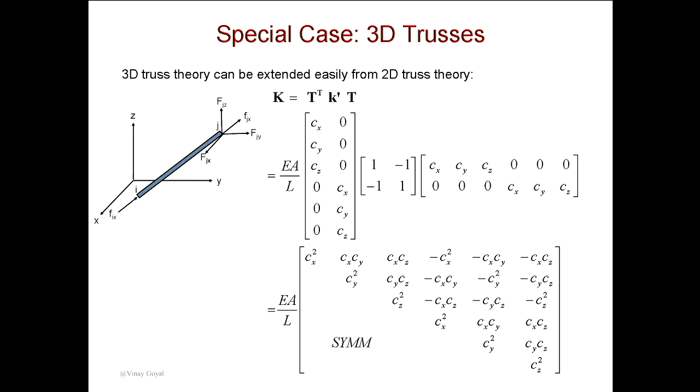Any questions so far? I'm almost done, two more minutes. I know it's been two hours, but that's how my classes go.

The force equilibrium: let me choose a row of forces, row I. So if I look at row I, K times D equals F, I multiply and I get that for row I. I'm going to apply a unit displacement at degree of freedom J, and everything else zero. So whatever has J, that displacement I'll make 1. Would you agree that everything else goes to zero, and I get Fi equals Kij?

One more time. If I look at a row of a stiffness matrix times D equals F, the deflection equals the force vector. If I multiply K times D, I get F, right? I'll choose row I, generally speaking. Now what I'll do is set degree of freedom J, one of these, to 1, and everything else to 0. If I set degree of freedom J, somewhere in between there's a Kij, right? But everything else I'm setting to 0, so all those go to zero. So I get Fi equals Kij.